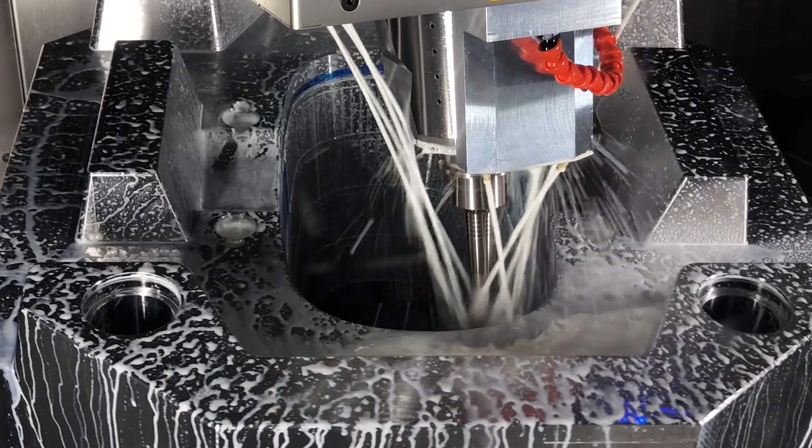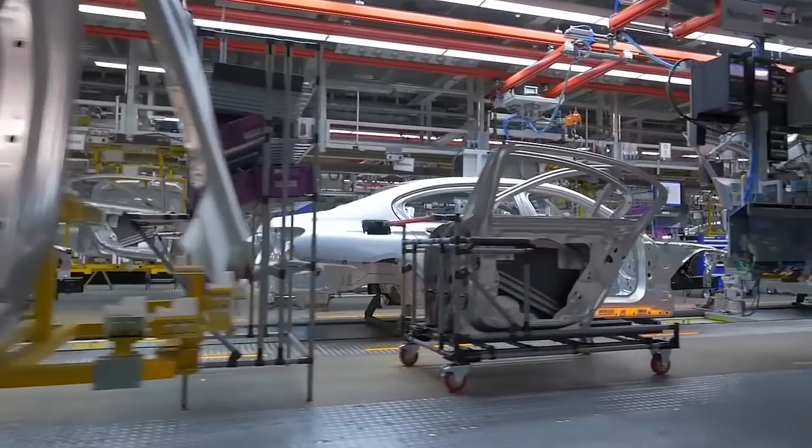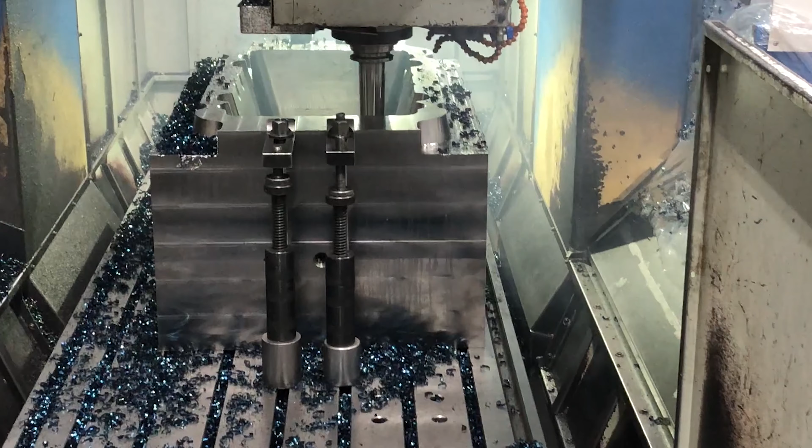RL, we produce quality in clamping equipment.

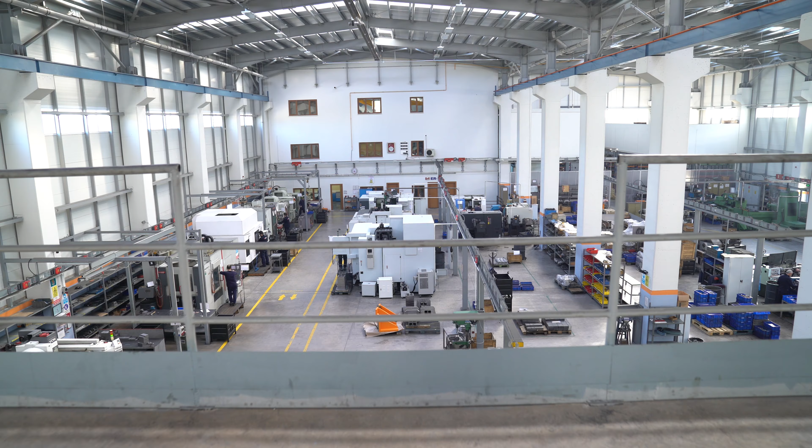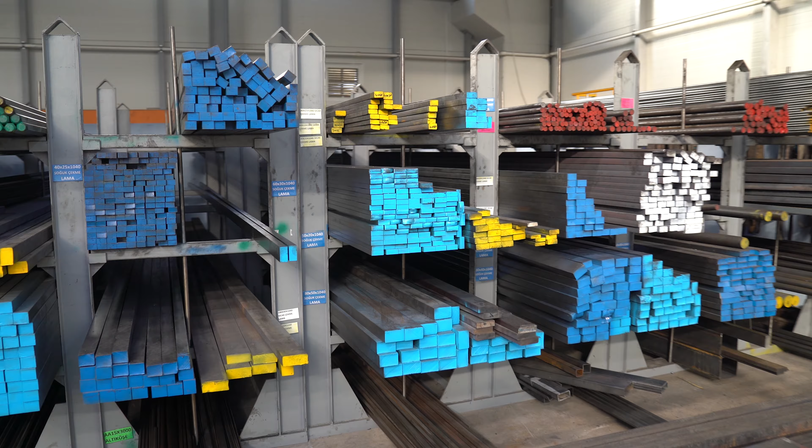Our company was established in 1989 in Istanbul. We produce products that make the symbol of trust and quality in mold and workpiece fastening equipment.

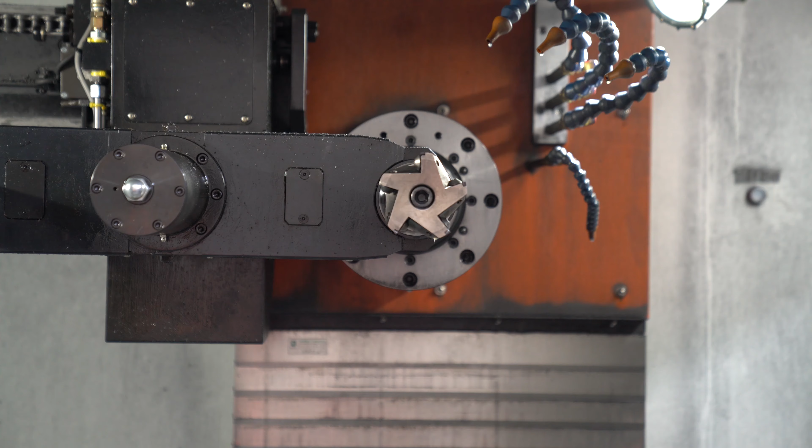In 2017, we moved to Kocaeli Dilovası, İMES Organized Industrial Zone, in our 5,000 square meter new factory production facility and management building. We work with superior performance for customer satisfaction by providing standard and project-based fixture solutions with our dynamic and expert staff.

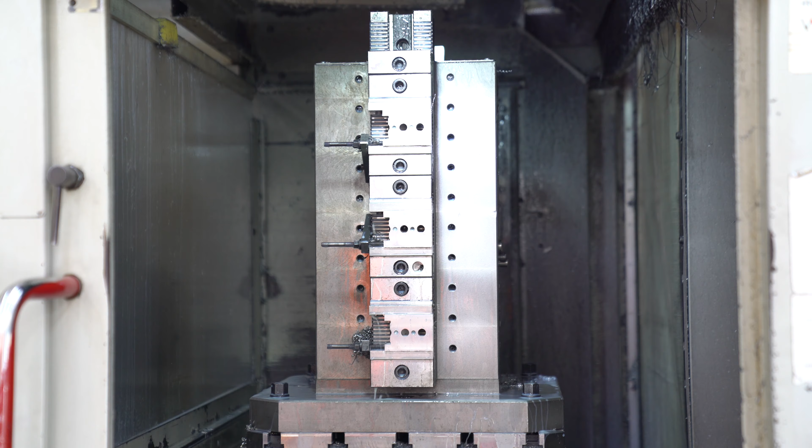RL has been progressing more and more confidently with increasing capacity and total employment in recent years. Today, we export to more than 24 countries, especially European countries. We continue our efforts to increase product diversity with our R&D department, which is active in order to provide solutions that meet the needs and demands of our customers, each of which has a distinct value and importance.

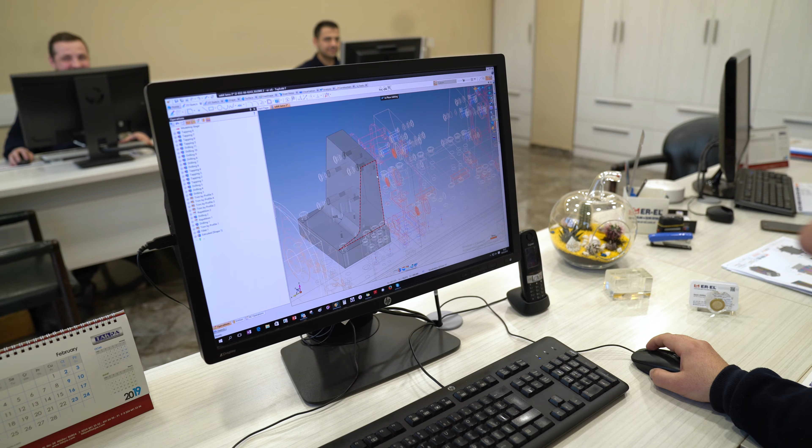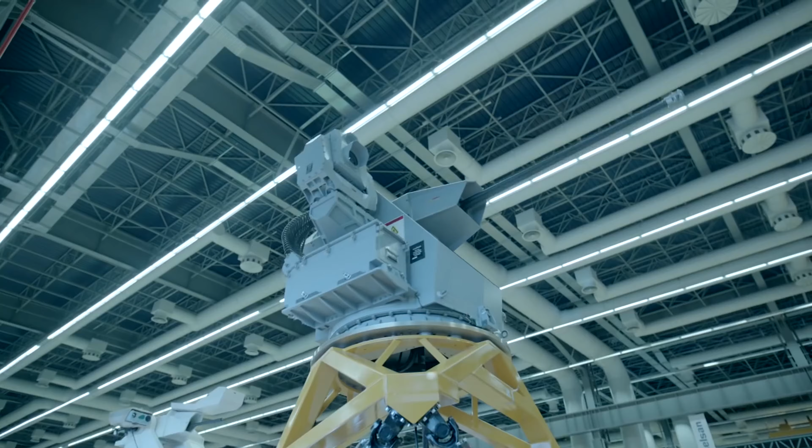As of today, we are proud to be a leading manufacturer company with over 3,500 products in workpiece and mold fastening equipment. Mechanical, pneumatic, and hydraulic fixture products, which are specifically designed and produced for the workpiece, are used in many sectors such as defense industry, automotive sector, white goods, heavy machinery, and weapon industry sectors.

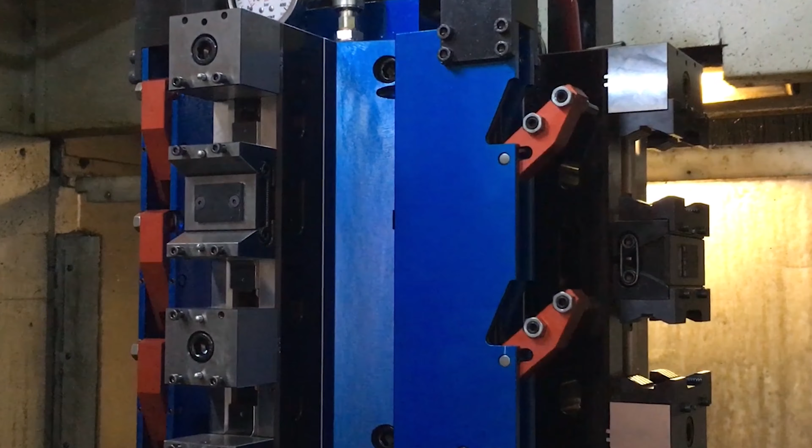In addition to our standard productions, we also produce project-based fixtures.

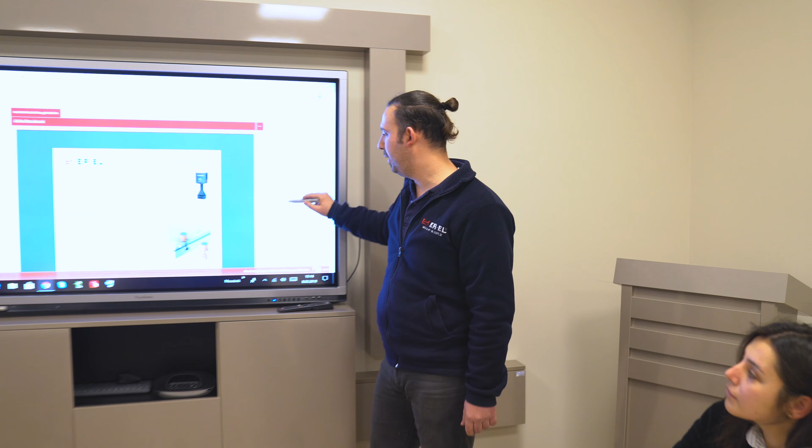With our product group optimizing system efficiency, we continue to produce world-accepted standards that are valid in the field. By increasing our investment on behalf of quality and safe products, ER-EL follows an efficient, sustainable path.